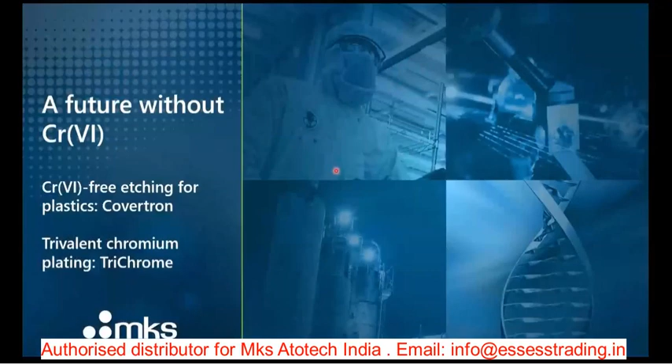So let's go to the future without chromium-6. For plating on plastics, there are several steps using chromium trioxide and PFAS. For plastic, the first step that we need to do is to make it conductive, or to metallize the plastic surface. In the industry, normally now it is using chromium trioxide as the etching step, followed by palladium activation, electroless copper or nickel.

And our Covertron process is a one-to-one direct replacement of chromium 6 etching. This is necessary for every plating on plastic step.

And for decorative plating, doesn't matter if it is plating on plastic or on different substrates, normally a multi-metal system is used in the industry. Copper, nickel, chrome are being used, and of course chromium 6 is used for the plating of chromium as the final finishing layer. Our TriChrome family is a direct replacement of this chromium 6 plating application.

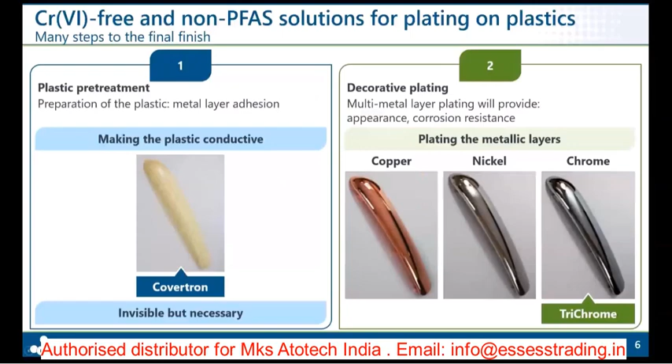Here's a short update on REACH about the chromium trioxide authorization status. This authorization is still pending. I would say this CTAC sub authorization or application is still pending, which mainly consists of two uses in the plating industry: use 2, functional chrome, and use 3, which is more related to the audience today, decorative and plating on plastic applications.

The update here is that this CTAC sub application is still pending, and there's no decision made. There's no update expected in 2024. All this application is still under the Annex 14 legal framework, and the application process is still ongoing.

The update also is that all these users or applicants under CTAC sub are allowed to continue using chromium 6 under some terms. For users of functional chrome, which I think is not the case in this room, there's a monitoring procedure which is mandatory under this Annex 14 application. This update about the CTAC sub application is covered in a Q&A available on the internet.

Thank you, Johnny. Very warm welcome from my side. My name is Ernesto, and today I want to present to you the chrome-free and non-PFAS plating on plastic process from Atotech. The name of this process is Covertron 600, the chrome-free etching process for ABS and ABS-PC from MKS Atotech.

At a glance, we can say that this is a chrome-free process. It develops a similar etching pattern compared to benchmark sulfur-chromic etching, through a chemical oxidant pretreatment. As you can see in the SEM pictures on the screen, the process develops a pattern that is very, very close to what is standard from sulfur-chromic etching.

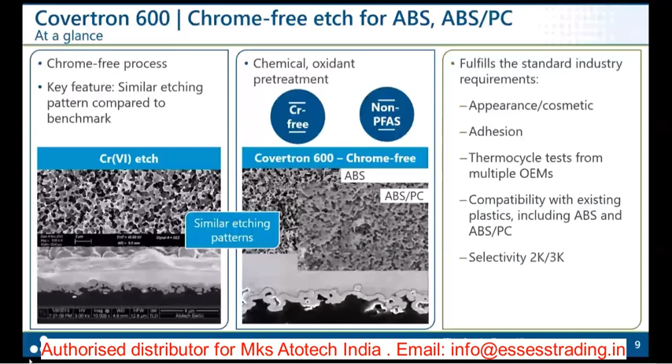The process, Covertron 600, fulfills the standard industry requirements in terms of appearance, adhesion, and thermocycle tests from multiple OEMs, is compatible with existing plastics including ABS and ABS-PC, and is able to work with selective plating. So we can plate selectively 2K and 3K parts.

The process sequence is also on the screen, and allows, as you can see, a real drop-in solution, as there is no pre-etch or any intermediate step required to go to the etching step, and it can work as well with any kind of pre-treatment or post-treatment after the electroless nickel. So whatever is currently in the plating line, being immersion copper, nickel strike, or copper strike, can work with the Covertron 600. This is what we say is really a one-to-one replacement for the sulfur-chromic etching process as we know it today.

When compared with the existing benchmark process, the first thing you can see is that the Covertron 600 works at 35 degrees. This is already an important advantage, as besides energy savings from this lower operating temperature, it will also help when etching the parts to avoid potential dimensional changes in the racked parts, which can later contribute to stress in the plated work.

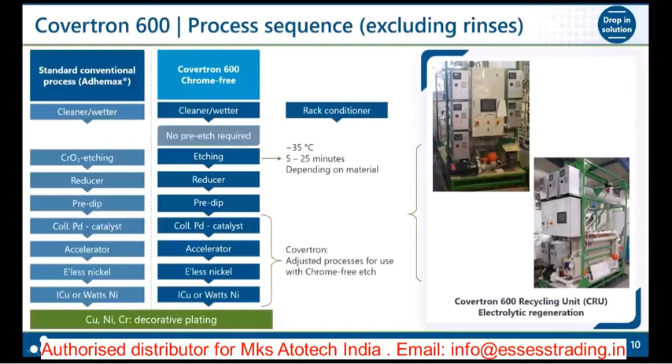The process sequence in detail for a conventional plating on plastic process shows here how the Covertron 600 will replace the current sulfur-chromic etching, and how it's really a drop-in solution, because in fact we don't need any kind of pre-etch here. Of course, we can also work with any kind of post or pre-plating after the electroless nickel. So we can work with immersion copper, we can work with a copper strike, or we can work with a nickel strike.

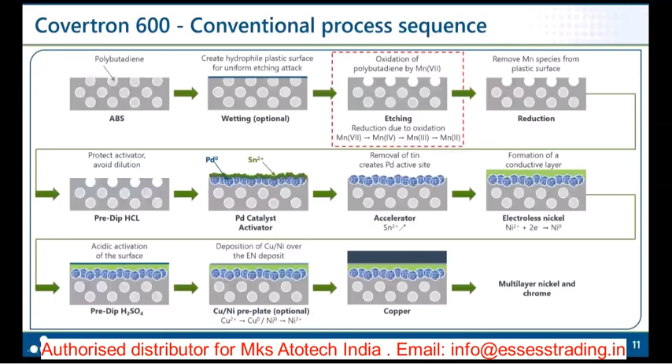The Covertron 600 process works with two additives, the Covertron 600 Part 1 and Covertron 600 Part 2. Both of them will influence the etching pattern of the plastic substrate, so both are important to create what we are looking for. As mentioned before, the etching time will depend on the base material, the resin. The molding conditions also play an important role, like currently with the sulfur-chromic etching.

We can say that the regular etching times with the Covertron 600 for ABS normally move between 8 to 15 minutes, and for ABS-PC parts, we move from 12 to 25 minutes when we have special materials.

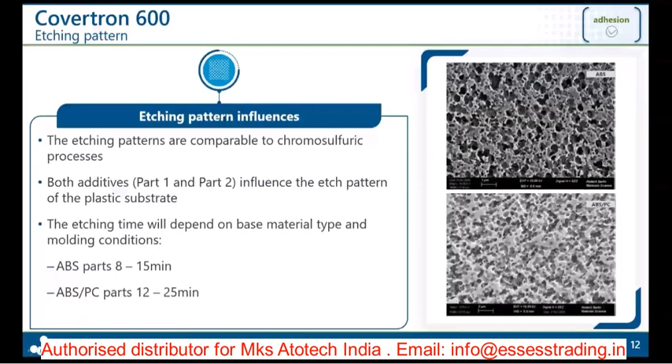In terms of thermocycle or shock test, what we can say is that the results with the Covertron 600 for the thermal cycling or thermoshock from many different OEMs have been and are really very good. We fulfill the requirements of many of these OEMs.

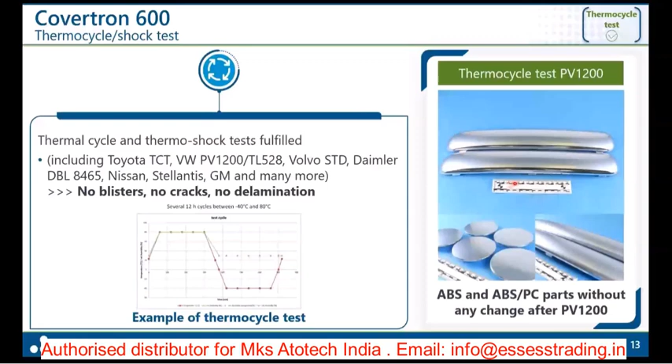We can mention just as an example the Toyota thermocycling test, the very famous Volkswagen PV1200, or the Volvo, or the Daimler, Nissan tests. We have fulfilled, and are fulfilling, all of them without any blister, crack, or delamination of the parts. Here on the screen you can see the results after the Volkswagen thermocycle test PV1200 for ABS and ABS-PC, and there is not any change after this thermocycling test.

Another important topic is what happens with selective plating. What happens when we need to process 2K and 3K parts? Here I can share with you that the Covertron 600 works with selective plating, and the selectivity that we can achieve is better than, or at least equal to, the benchmark process.

If necessary, longer etching times will be capable of removing any slight molding skins that could be on the surface of the part, and this is comparable to the sulfur-chromic etching. We confirm this because currently our customers are in production with 2K and 3K parts with very good results, so this is confirmed by production. Here you can see an example of selective plating with our Covertron process.

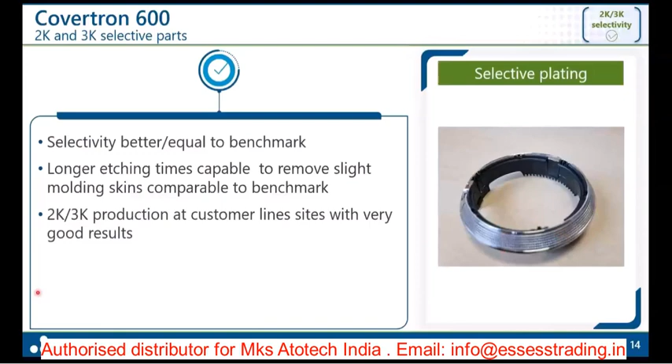One important question from your side will be, okay, what happens with the materials? The substrate compatibility is good with the Covertron 600. We can share with you that the list of plastic substrates which have been processed through our Covertron 600 is long, and shows that the current substrate compatibility with this etching process is excellent.

It's not necessary to request any modification of the resin, or to change the existing resin with specific modifications, to be able to process the parts through a chrome-free etching process. No, we don't need that. We are working with exactly the same substrates that our customers are working with in the sulfur-chromic etching in the current lines. If we talk about qualified resins, we can mention for ABS and ABS-PC: Novodur, Starex, Polylac, Lupoy, Bayblend, Terluran, Cycolac, Techno, UMG. So you see that the list is very long.

We have many samples plated in MKS Atotech POP lines over the last years, and customers have plated many different materials. A database for different materials is available for our customers. About other materials, we know from our own production experience that Covertron 600 works with polypropylene, and also 3D printing resins have been qualified with the Covertron 600.

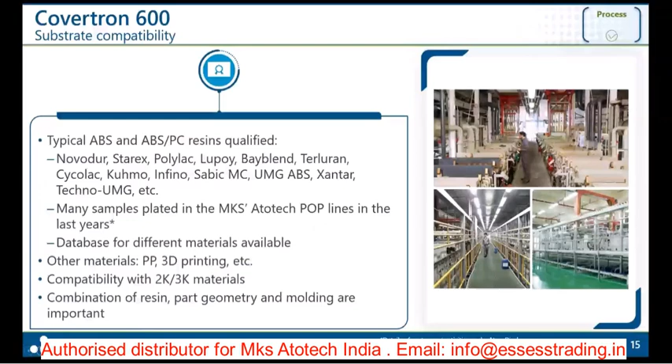Now about the fundamentals of the etching process and the reoxidation mechanism for Covertron, I will show this in the following slides. What we want to show here is that the chemistry of Covertron 600 is based on manganese. This element can exist in different oxidation states, from manganese 2 up to manganese 7, with manganese 3 and manganese 4 in between.

With a higher oxidation number, the oxidation potential of the manganese chemistry is higher. So we move in this direction toward manganese 7, which has the highest oxidation potential we can achieve. With Covertron 600, only this manganese 7 stage is the active species that works for etching, in the form of permanganate.

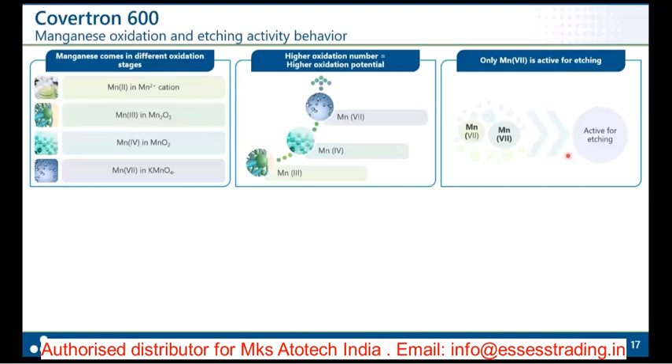In Covertron 600, this permanganate, the active species for etching, is introduced through the Covertron 600 Part 2 additive. This manganese 7, depending on the working conditions, is not active for etching over a long time.

What happens is that over time, this manganese 7 breaks down as a result of an autocatalytic reduction reaction. This means we move from manganese 7 to manganese 2, which becomes inactive for the etching purpose we require. Remember, this autocatalytic reaction is driven by time and results in these inactive species.

When we discuss the reaction we currently have, the basics of etching are chemical oxidation. In simplified terms, the permanganate, manganese 7, is able to etch or attack the double bonds of the butadiene through Part 2, which introduces the manganese 7. In this process, the manganese 7 is reduced to a lower valence.

Here you can see, in a simplified way, the double bond of the butadiene present in our resin, and as a result, the manganese is reduced. This is shown again on screen: how manganese 7 moves from the active species to the inactive one.

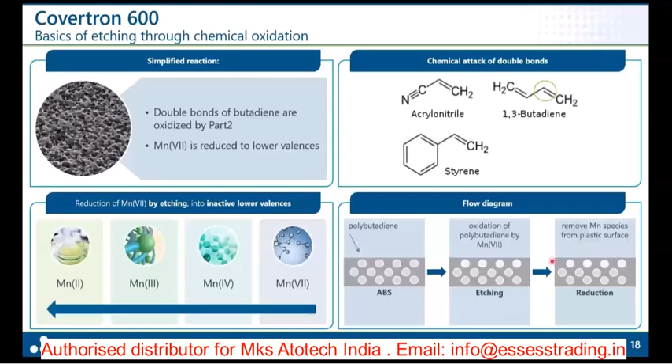When we talk about the components of the Covertron 600 system, we need to talk about the chemistry: a manganese-based solution to etch the plastic, and you've just seen how this solution is able to oxidize the plastic resin.

We also need to talk about the regeneration unit, the Covertron regeneration unit, because this unit helps keep the manganese 7 active, preventing it from becoming inactive through the autocatalytic reaction. We need to reverse this process and bring all the non-active manganese species back to the active permanganate material. This is the task of this unit, and it contributes to lowering the running cost. This is very important because, as seen from the beginning of the presentation, for regular production we compulsorily need to work with a reoxidation unit.

And finally, what we have is a spray application of the etching solution. You can see here a spray booth which will put in contact the etching solution and the plastic parts, and will help create this pattern after the oxidation of the resin. Important that this spray application can work without producing any hazardous mist, and will allow the process to reduce dramatically the necessary volume of the etching solution needed to etch our production parts, while giving us excellent metallization and adhesion results.

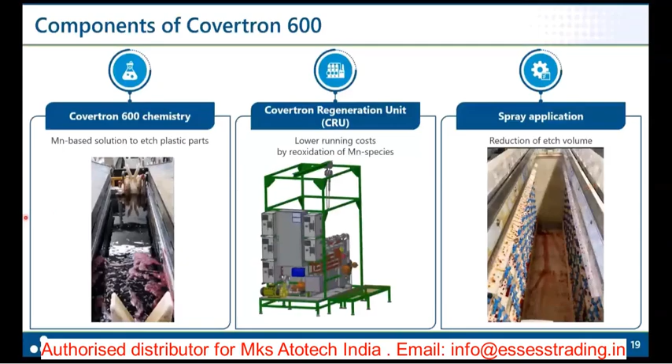In describing the function of the different steps, the function of the solution is really to etch the parts. What we see on the screen is the process sequence, and we follow exactly the standard pre-plating process that we have in the current lines. With the Covertron 600, we can use the same sequence while giving good adhesion of the subsequent metallic layers, which gives the plastic part the right decorative finish, the right performance in terms of adhesion and thermocycling tests, and the possibility to work with all the different materials, including selective plating. Covertron 600 fulfills all these functions, allowing us to achieve industry standards. As you can see in the SEM pictures, the pattern is comparable to the benchmark process.

If we use, for instance, one of the standard specifications in the market to check the requirements for peel strength testing, what we see is that compared to a typical specification for the current process, with Covertron 600 we can achieve at least the same values, but our experience is that we can even get higher peel strength values than the benchmark process.

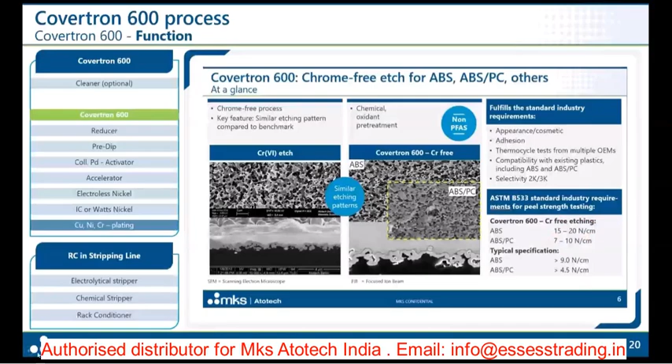The etching chemical solution is based on a 3-additive system, based on manganese, which will be responsible to oxidize the butadiene and develop the adhesion.

As mentioned before, for mass production, special equipment is necessary to keep the process active. This is absolutely needed: this regeneration unit is called the Covertron Regeneration Unit, or CRU. The task of this regeneration unit is to keep the concentration of manganese at the right level in an active oxidation state. So we need to keep the manganese, but in the right oxidation state.

The working conditions of the etching solution can be controlled and adjusted by the CRU automatically, because this auxiliary unit will be able to control the conductivity, and based on that we can do this control and adjustment. The additives must be replenished only by drag-out due to production, and always according to the analysis. We strongly recommend regular monitoring of the process through daily analysis, and of course monitoring the critical parameters that influence the behavior of the process.

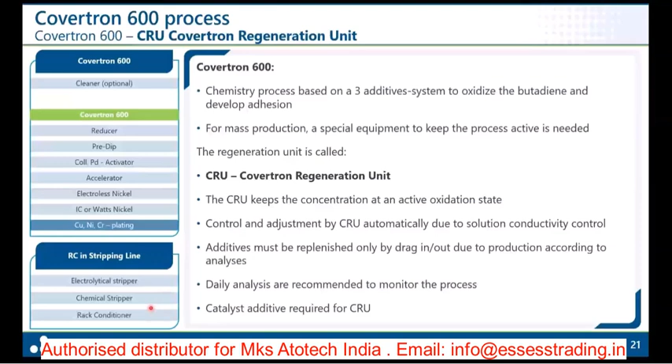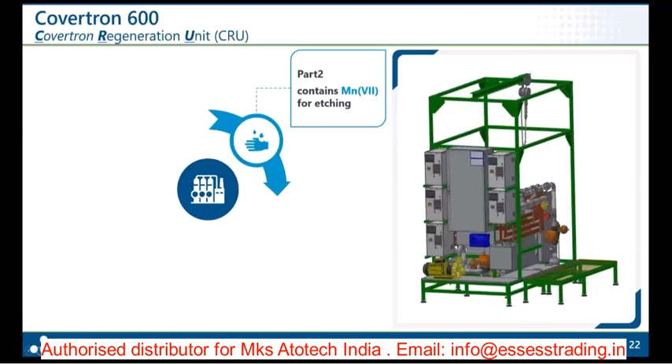So we talk here about the Covertron Regeneration Unit. At a glance, part 2, containing the manganese 7, is what we add with our Covertron 600 additive package. This works with the plastic substrate, and the manganese 7 coming with part 2 will be reduced to lower valence, becoming inactive for etching.

We need to consider that this reduction of manganese 7 comes from the oxidation of the resin, but also as a consequence of an autocatalytic reaction, which is accelerated by temperature. What this unit is responsible for is to regenerate this manganese, which has been reduced to lower valence, and bring it back to manganese 7, keeping its concentration stable and allowing the system to continue oxidizing the plastic resin.

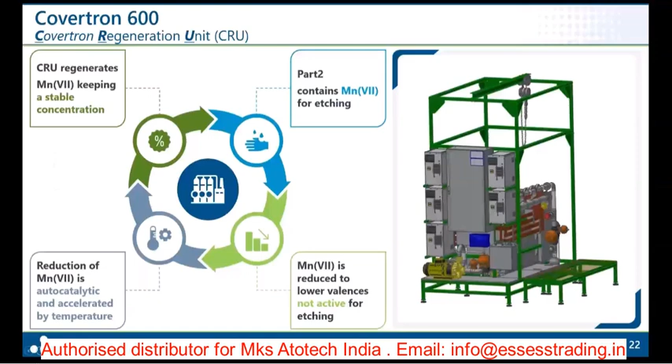Let me share with you the field experience that we have with the Covertron 600 from different countries and different customers.

Currently, with over 20 installations worldwide, most of these installations are working for automotive. Most of the experience we have with Covertron 600 is related to the plating of parts for the automotive market. Customers have validated the performance of Covertron 600 on ABS and ABS-PC for multiple OEMs. Also, the selectivity is fully confirmed because we are in production for multiple 2K and 3K parts. The appearance, adhesion, and thermocycling tests have been passed, and we have met all the requirements.

The internal and external pre-validations of the process have been completed, passing all the requirements from the automotive industry. The process is installed at multiple customers in many countries and different regions, and multiple PPAPs have already been achieved through multiple OEMs, and a lot of these PPAPs are ongoing already.

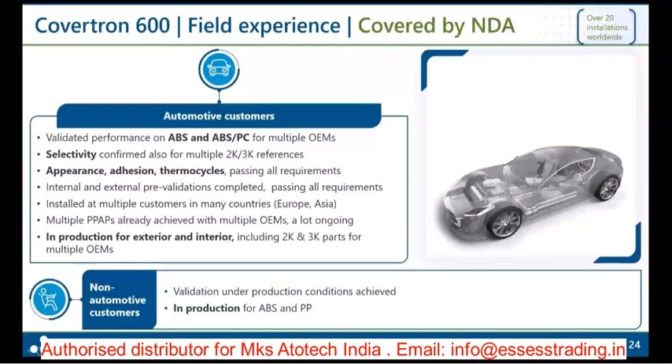But of course, here we are talking about the replacement of the hexavalent chromium, the chrome 6, from a plating on plastic line.

And until now, we have discussed and introduced what happens in the pre-plating of this part. But also, if we want to eliminate the hexavalent chromium, we need to consider also the end of the plating process. That means when we need to plate the decorative chrome.

Here the target again is to eliminate this chrome 6 from the decorative process. And for that, what we get is the trivalent chromium process. Here we want to introduce the trichrome family, the different processes that MKS Atotech can offer, from the chrome 6-like color to the dark finishes.

In this case, we can propose two alternatives. One is the direct replacement for the bright hexavalent chromium, and for that we present the Trichrome Plus: high plating speed, excellent results in the calcium chloride test, good corrosion resistance, working with graphite anodes.

We can also propose the Trichrome Ice, especially when the intent is to target the brightest color possible and a color to match the benchmark color from Chrome 6. The throwing power is very good, excellent corrosion resistance, and in this case working with mixed oxide anodes.

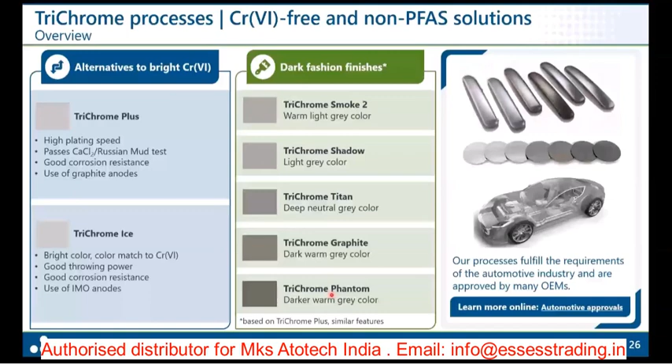Going a little bit deeper about the bright chrome finishes, working with the right multi-layer nickel system, the Trichrome Ice and Trichrome Plus can offer excellent CASS results, excellent neutral spray results with the post-treatment, and in the calcium chloride test, the results with Trichrome Plus are excellent. Of course, Trichrome Ice and Plus will not offer exactly the same color.

When the main goal is to match the color from the decorative hexavalent chrome, Trichrome Ice is the answer. With Trichrome Plus, we have very long experience - it's been in automotive for more than 10 years, and from other markets, we have experience for over 40 years. Trichrome Ice is the ideal solution when we need to match the hexavalent chromium color and shows excellent resistance to the ACT test.

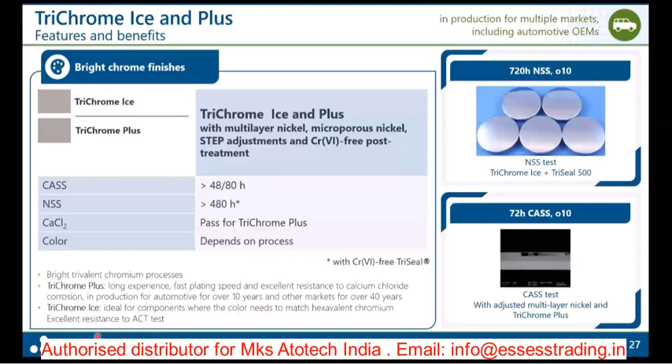If we go to the dark chrome finishes, the long-lasting processes with Atotech are the Smoke 2, the Shadow, and the Graphite. Again, based on the same chemistry as Trichrome Plus and giving similar features - good CASS, good neutral spray, good calcium chloride results. The color will depend on the different processes, and we are able to offer processes with stable color and stable plating speed in production. These processes have been in automotive for many years, giving design departments the freedom to develop new finishes for customer requirements.

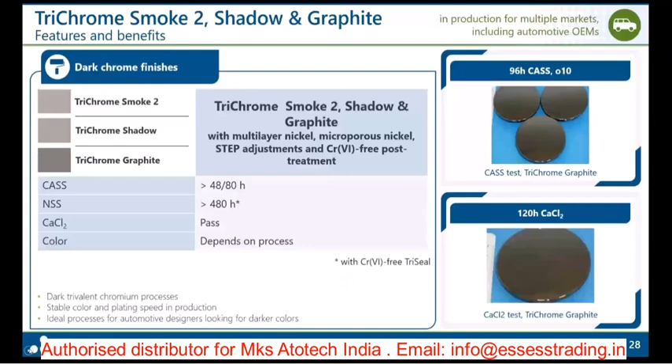Let me also talk about the latest introduction from Atotech, also in the field of dark chrome finishes, also based on the same chemistry as Trichrome Plus - we have Trichrome Titan and Trichrome Phantom, again with the right multi-layer nickel, giving the same excellent results. In the case of Trichrome Titan, it's a unique color, able to give stable and good plating speed in production, but this is really a deep neutral gray color. The process is in production for automotive OEMs and is very well appreciated for giving this specific neutral touch to the parts. The Trichrome Phantom is the darkest shade given by the trivalent chromium processes from Atotech, also in production for different OEMs, and is able to give a real deep, dark, warm color.

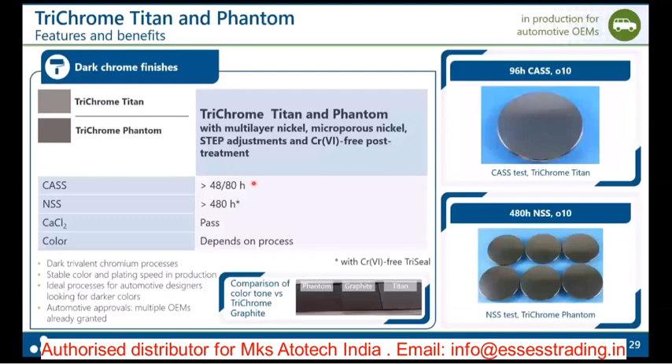But when we are talking about chrome-free or chrome-6-free plating process, we need to consider also the post-treatment after the trivalent chromium process. These post-treatments are recommended when we need to fulfill the requirements in the field of neutral spray corrosion resistance. Atotech, MKS Atotech, can propose two options.

One process is the Tri-Seal 300. This is a post-treatment which will improve the performance with neutral spray test, and is applicable on bright colors only - just for bright colors. So that means the Tri-Seal 300 will work for the Ice and the Plus. With this, we can achieve more than 480 hours in neutral spray.

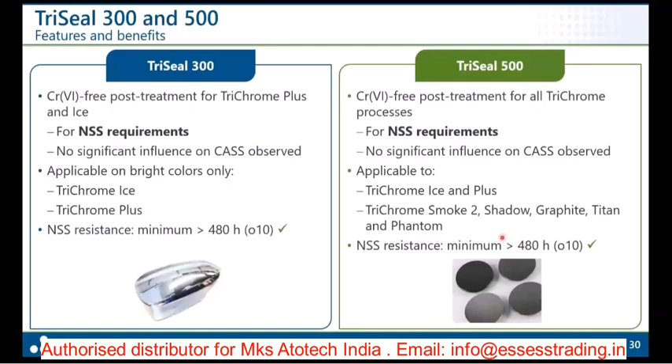We can also propose a Tri-Seal 500, which is also a chrome-6-free post-treatment, but in this case, for all the trichrome processes. Again, the requirement is focused on neutral spray corrosion resistance, so there's no significant influence on CASS. The performance of this post-treatment is good with all the trivalent chromium processes, being bright or being dark. In this case, we can also achieve more than 480 hours in neutral spray test.

So, last but not least, the final chrome layer is a trivalent chromium layer, and we need to consider that in any case, it's part of a multi-layer system - it's more than just trichrome. To achieve the required performance, the appearance and corrosion resistance start already from the copper and nickel layers, so we need to consider that we are working with a system. MKS Atotech has over 40 years of experience with trichrome, and our patented multi-layer system and trichrome solution will help you reach the highest corrosion requirements of the automotive industry for exterior application, to help achieve different finishes, and, very importantly, to do this without Chrome 6 in your plating process.

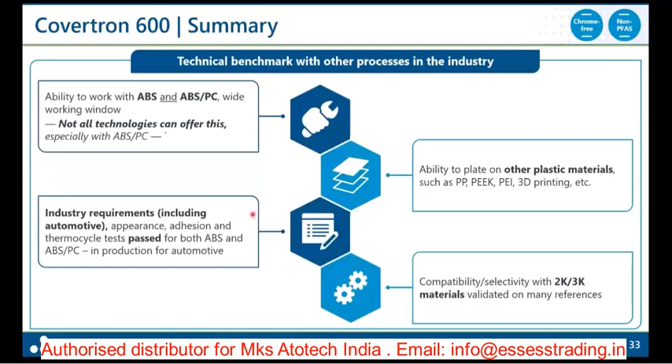Supply chain consideration is a very important note for all of the audience today, because for automotive or other applications, quality is very important, and there's a long and time-consuming qualification process needed if there's any major change in the process. This is a very extensive job, involving different stakeholders in the supply chain, including OEMs, tiers, our customers, and also equipment and chemical suppliers like MKS Atotech.

As I already presented, this restriction deadline is coming, and I can encourage everyone, including our company, that we need to prepare and act actively for this change as early as possible. As a company, MKS Atotech is committed to this innovation and, very importantly, to sustainability for all our customers and partners in the supply chain.